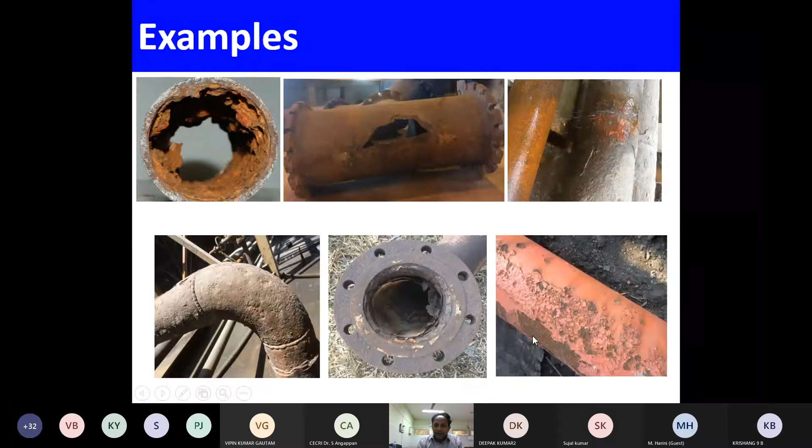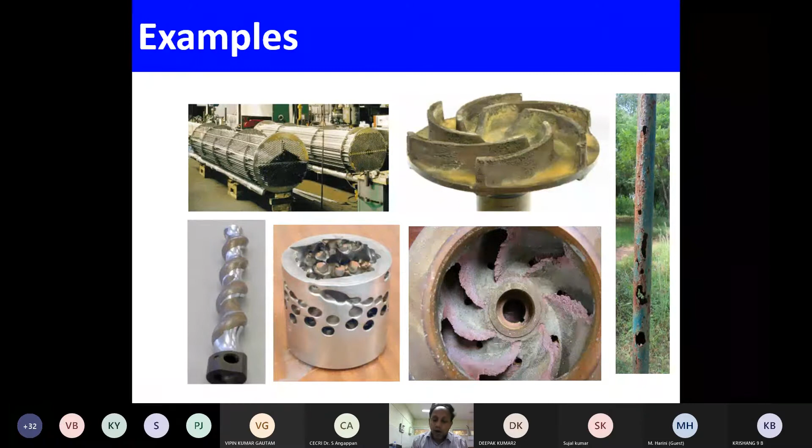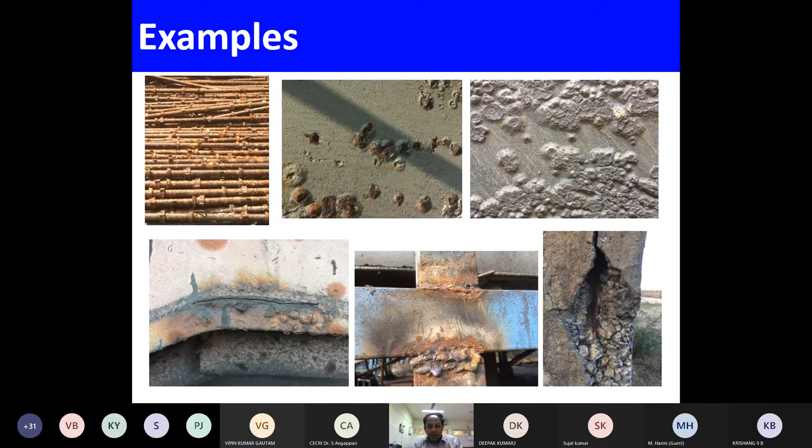Now you see that inside the steel rod, corrosion has happened. Once the corrosion has happened, the product which was accumulating on the surface built up a lot of stress. Then one day it cracked the building. That is how your building collapse happens.

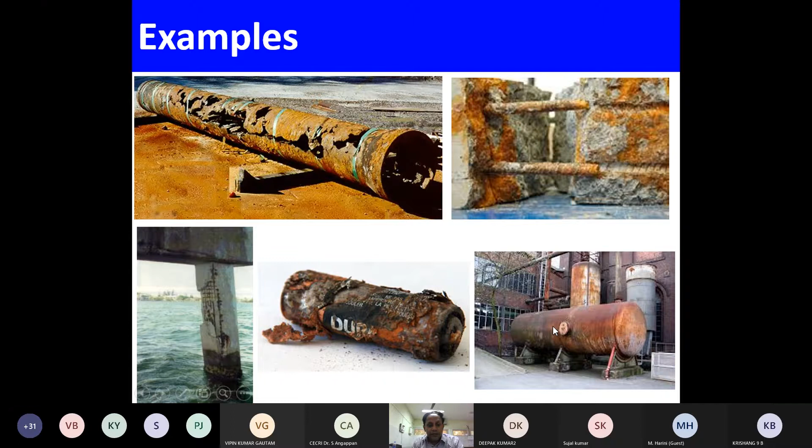Then this is a storage tank or a transporting tank. When we go to a petrol pump, the petrol comes to the petrol pump through a container. It's made of metal, or the gases coming to the depot, that is also made of metal, or your acid, all these things use metal. So everywhere, the components we are seeing here are mostly corroded.

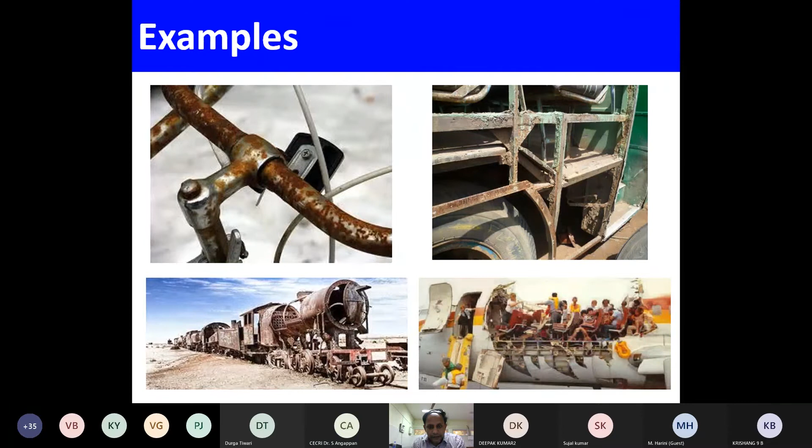That bridge... just a minute, Barik sir. Yes, sir. Barik sir. Yeah, please go ahead, sir. Are you moving the slides? Yeah, slides can move, no? Yeah. Okay, sir. Okay, moving.

So what I was trying to tell you, we saw the transport sector, just one example, remember our cycle, how it's getting corroded. Then we come to pipelines, bringing drinking water to home or bringing petrol to our vehicles. Then we look at the building where we are living, the steel structure inside the building is also getting corroded. But all these structures are external.

Like right now where I am sitting, the chair legs, suppose they are made of metal, or the desk where you keep your laptop or your books, that may also be made of metal. Just observe in your classroom, all these benches and tables, if they are made of any metal, they are not looking new all the time. So we give a coating. Still they start corroding. And how that corrosion happens, I will explain.

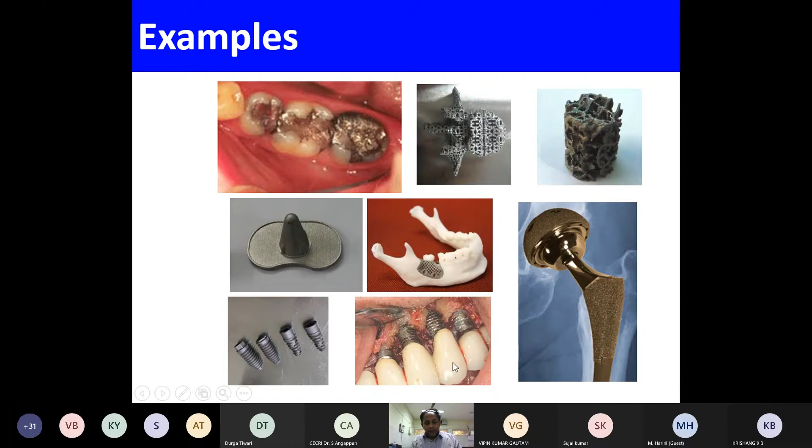Then it contains a crown. This is the crown. It will be made of ceramic or maybe metal, depending on the cost and other things. But what I'm trying to tell you is, all these components undergo corrosion. So now I show you one example here. You see what's happening here.

So normally corrosion is what we call a chemical or electrochemical reaction between a material, that is metal, and its environment, and that produces the deterioration of the metal and its properties. It means you saw your cycle, that structure, your handle is made up of a metal, and it reacted with an environment. What is the environment? Every day you go to school and come back. The environment here is your atmosphere.

Like I was telling you, an example, your classroom. In that classroom, you have a bench and you have a table. Then those benches and tables start getting corroded. So what is the environment here? That is the classroom. But we have to look at the property of the classroom. What exactly is there in that atmosphere that actually corrodes my metal?

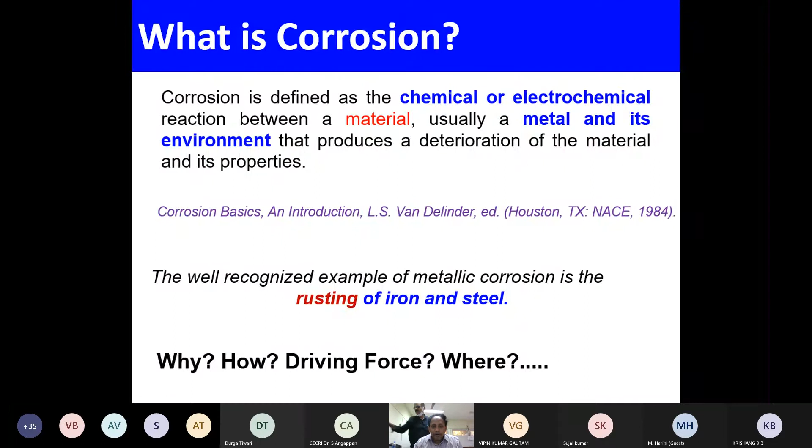So now we will see. If you remember your class 8 book, metals and non-metals, in the first paragraph it talks about the minerals, it talks about the ores. So here, when I am talking about my cycle, what metal is it made of? Is it made of mild steel?

And if I look at my mobile charger, the current is coming from the plug to your mobile. What metal is inside? Is it coming through a plastic wire or a metal wire? And your laptop also, what is the body? If you look at the laptop body, is it a plastic one or a metal one? And your key also. So all these structures we see around are actually metal.

So what happened here initially, if you see the human civilization, the progress of the human civilization occurred due to this discovery of the metal. These minerals are all lying under the ground or above the ground as a reservoir. These things they called minerals or the ores.

If anybody has read today's Indian Express, it was written there that long back, more than 460 BCE, the Karnataka region and Tanjavur or Salem were the places they used to extract metals like iron from the ores. And they used to export to different parts of the world. And from that, they were actually responsible for changing the civilization. A lot of ships, a lot of containers, everything came up once they were able to extract iron from the ores.

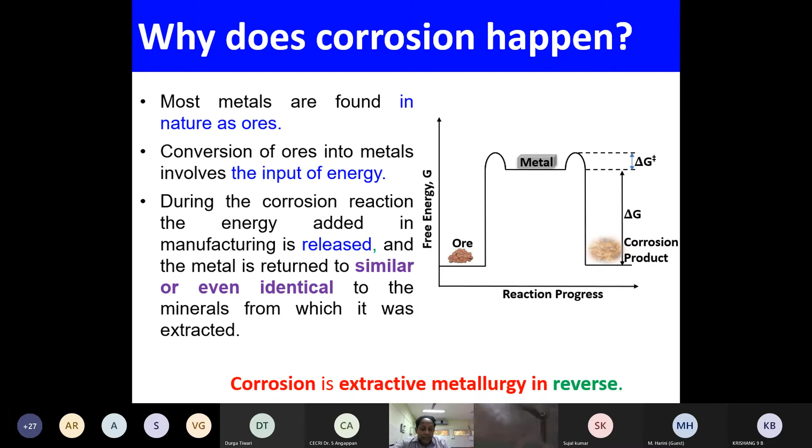Like any metal structure you see, for example our house, the wall might be given a nice color. You like, oh, I need to put a color into my bedroom, a pink color or maybe a blue color, depending on your choice. But it is not only for aesthetic purpose, it also has the ability to stop corrosion. That's what I will tell you.

So now we'll understand how the corrosion is happening. How my cycle is corroding, how my car is corroding, how my aeroplane is corroding, how the pipeline is corroded. So it is a metal. Let us think of a steel metal, and its composition is of iron.

The 8th class students should go and look into the metals and non-metals chapter. They should know which metal has what symbol. For example, iron is I-R-O-N, but the symbol we use is Fe. So in the periodic table, they should remember at least up to 30 elements by heart, starting from hydrogen up to zinc, or if you can, all 118. But there is a very easy way to remember.

You must look at what relationship you can develop with each element that you can see at home from the periodic table. For example, I am drinking water. In the periodic table, you will find hydrogen at position number 1, and oxygen at position number 8. Similarly for iron, you have to find its position, or the other elements there.

Okay, now I want to know how the metal is corroding. What happens? Just look at this beaker. I have made a rectangle schematic. It is a beaker, and this beaker contains an electrolyte. An electrolyte, I'm sure this terminology is also in the class 8th book, is nothing but a chemical compound which has the property to carry current in the ionic form. There are some ions that can carry the current, and that is inside this beaker.

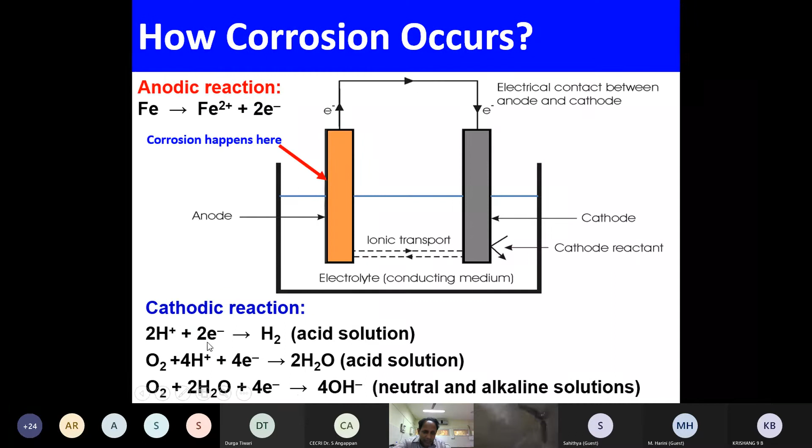Now you can see here what I'm trying to tell you. Now my metal has been eaten away from this plate. So Fe2+ will physically come out. The Fe2+ will come out, reacting with the other chemicals on the other side, like oxygen plus water, which was here giving rise to OH-, and is now forming iron hydroxide and a precipitate. So this is how corrosion actually happens and the product formation occurs.

And it's a very simple example. What I'm trying to tell you here is that when this iron and steel starts corroding in acid media, we saw some bubbles. But in the other places, with this OH- which is formed, you see there is a series of reactions. Fe2+ plus OH-, iron hydroxide, Fe(OH)3, then Fe2O3 and water. So these are the reactions.

This example is of a droplet of water lying on your cycle surface, or on the bench in the room. It's a very tiny amount of moisture. Now the oxygen from the atmosphere, the oxygen which we are breathing, also gets into this electrolyte and dissolves there, and this reaction initiates, and you get a different product. This is how corrosion happens.

But here is one example I have given, and I'm sure people will know where this structure is. Can anybody tell? Where is the structure? What is this one? Iron pillar. Yes. So this is at the Qutub Minar in Delhi. This is an iron pillar. The name itself suggests the composition is iron.

So why did I put this example here? This structure doesn't corrode. I think it's maybe 1,000 years old now. I don't know the king; the name of the king is probably Chandragupta. I think during that time this was being made, because India was undergoing a lot of furnace development. They were discovering these ores, and from these ores they were able to extract pure iron and make some products.

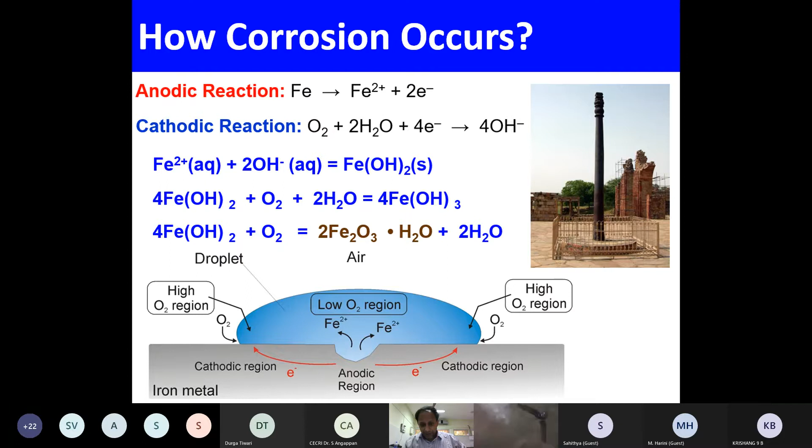So when they were extracting the pure iron and making this particular pillar, they added a couple of elements like phosphorus, which helped in forming a film on the surface, and they were able to protect the structure. So this is the structure.

Another example I'm giving you, which you will see in your textbook, is iron and copper. Here I have taken steel and a copper wire, and exposed the two of them to water. For example, in a heat exchanger, there are tubes coming in. These are like titanium tubes, and this particular one is copper. In these two cases, you can see this first one.

This example you look at here. This is very clean. This is corroded, that is not corroded. When two metals are joined together, like sometimes your metal door is there, if the handle is a different composition, you will see corrosion starts there. Then if you have nuts and bolts of two different compositions, there also corrosion starts.

So these are the examples I'm trying to tell you, and here I'm telling steel and copper, but steel is the one which is corroding, when they compare. These things you have to look into a textbook. It is called the reactivity of metals. You can look into the series. There are platinum, titanium, carbon, and at the top of the series is gold. Like for example, the jewelry gold.

If you see the jewelry, the gold, why is it so expensive compared to steel? First of all, gold is not found as ores. There are some ores, but mainly gold is available as gold. So it never existed as a compound. It's very stable in the air, normal atmosphere. It will never react and form any product.

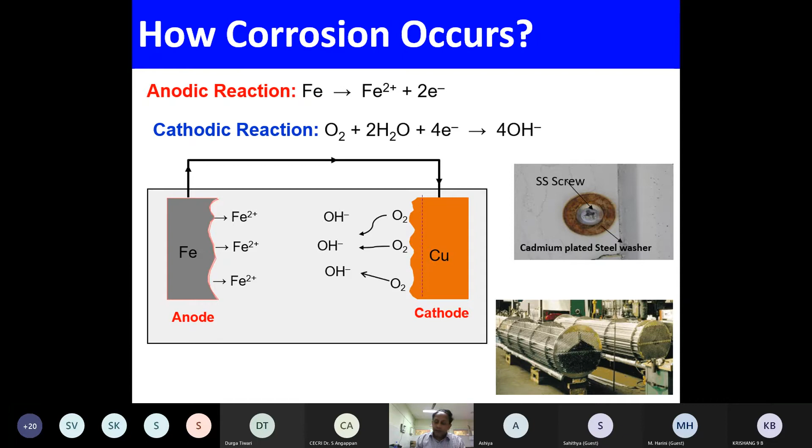When you go to higher classes, you will understand why they have been ranked like that. But I can tell you, a lot of measurements have been done to prove that a metal like gold will not corrode. If you make jewelry out of iron, it will corrode. We do electrochemical measurements, and we have confirmed this.

And this is another structure here. Can anybody say where it is? Anybody? Anybody from Tamil Nadu, or the Kanyakumari side? Sir, I am from Tamil Nadu. Yeah, can you say where it is? Have you been to Kanyakumari? No, sir. Okay, this is called the Thiruvalluvar statue. If you go there, you will see the Vivekananda statue on one side and this statue there.

But the interesting thing, why I put it here: what are the factors involved in corrosion? So far we saw the atmosphere is also responsible for corrosion. Then I showed you a beaker with liquid, an acid environment, with oxygen and water. But this structure is in the sea itself, in sea water. This structure is not made of metal, it is made of stone, so there is no corrosion, but another phenomenon occurs called erosion. Our institute also works to prevent the erosion of this statue. This poet is very famous here.

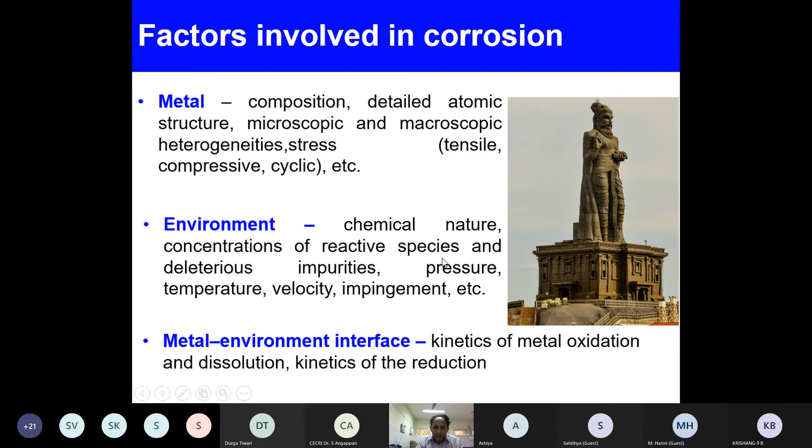So whatever environment you are seeing, any compounds which are very reactive in nature, high temperature, high pressure, your metal and this environment can start reacting and corrosion can proceed. So now I want to prevent corrosion. How do I mitigate it? The metal which is corroding is called the anode and the metal which is not corroding is the cathode. Then I have an environment, that is your electrolyte, and here the current is passing. So I have 4 components. If I can control one of them, I can mitigate the corrosion.

So what changes should I make to the anode to control the corrosion? What changes can I make on this side to control the current? And what strategy can I adopt so the current doesn't go from this metal to another metal? Like at home, when you're plugging in your mobile phone, the 2-pin plug, you are holding it by the plastic.

So plastic is what it does. It doesn't transfer any current to your hand, so that way you are protected. So similarly, this current which is going from this metal to the other side, I can put a plastic cover on it, or what you call a coating.

Or this metal which is corroding, I can change it or I can do some coating on it. It will not corrode. Then I have an environment here. I can put a barrier in between that. Like our wall, I told you, inside the wall you have the brick, the cement, then you have a steel rod. But on the top of the wall which is facing us, we put a coat on that. We put a color. So that color will stop the oxygen and water from going inside and stop the corrosion. It will not allow that.

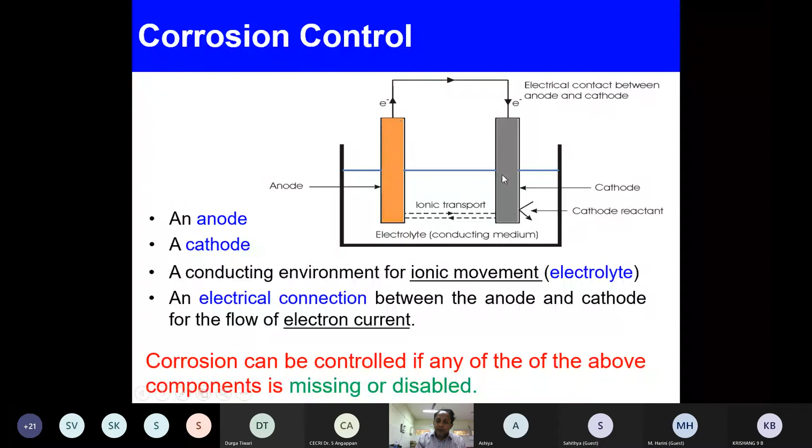So this is what I'm trying to tell you. This whole setup is responsible for corrosion. We can control it if one of the components is missing or disabled, or I can put a barrier and all that. So these things we will discuss. So what do we do actually, how do we control the anode part? I can modify the metal.

Like if you look at the stainless steel utensils in your home, they are made of steel. But your normal pipeline is made of mild steel. In some pipelines, the composition is only iron and carbon. But to get a better alloy, we put iron plus carbon plus chromium plus nickel. So we modify that metal. We make some alloy, and then we can do modification of the environment in this room.

In this room, if a lot of things are there which are going to corrode my metal, if I can remove them, we can also prevent the corrosion. There is one terminology we use: scavenger. Oxygen in the atmosphere is very responsible for corrosion. If I can remove all the oxygen, there will be no corrosion. Then change the metal. Okay, then I can have some non-metallic materials for construction. It means instead of using a metal species, if I can use some non-metals like plastic, it will not corrode.

So what we do, we use a suitable alloy, so we modify the metal, then we put a coating. If you put a coating, you create a barrier between your corroding metal and the environment. Then you do cathodic protection and use a corrosion inhibitor. These are some strategies I'm going to talk about. You can look here. This is the rebar which is in the wall of your house. We have given a coating so that this will not corrode.

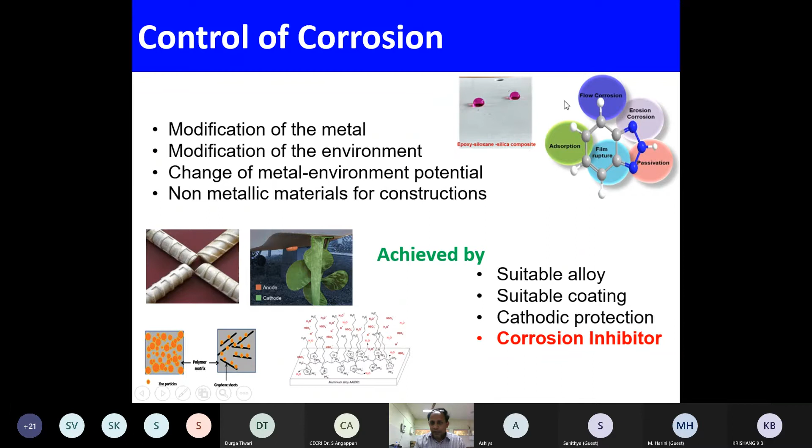Then you can see this is actually a ship. This is a propeller. So in order to protect the ship from corroding, I am using a different metal, and by doing that I can protect it. And this is a metal. I have put some coating on top of it. This is a superhydrophobic coating. It will never allow water to accumulate on the surface, so it repels the water. That's why it's called superhydrophobic. And these are the mechanisms we explain. So I'm going to talk about them a little bit.

I know this topic will be very tough for you, but just to understand, go back to your classroom and look into the metals chapter, and there are concepts like what is corrosion, what is anode, what is cathode, what is an electrolyte, what is plating, what is galvanization. Read these terminologies.

Okay, somebody's mic is on. Can you switch it off? Can you mute it? Someone's mic is on.

Okay, so this is a chemical substance we take. A chemical substance means like your salt, what you're eating, that is a chemical substance, sodium chloride. So in the lab, we put a lot of chemicals in that environment to protect it. Imagine water is coming to your home through a pipeline. The pipeline is corroding. So I have to use a chemical that will protect the pipeline as well as not harm us. It will not create any damage to us.

Or your pipeline: when you are going on the street on the main highway, you will see big pipelines going along the highway. These pipelines actually carry your oil, maybe crude oil, the processed oil like diesel, petrol, kerosene, and gases, and all these contents.

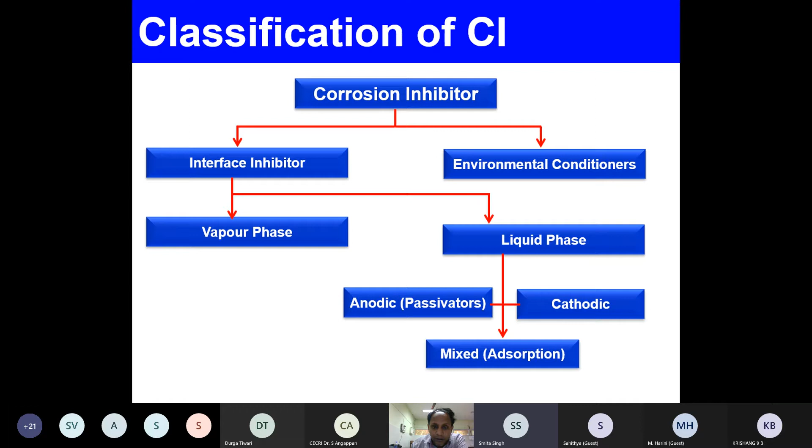So what people do in order to protect the inside from corrosion: they will add some chemical substance, and that chemical substance will go inside the metals through that petrol and diesel, and it will form a film on the metal substrate, and it will prevent the corrosion. So these are things I was trying to tell you, and this mechanism is forming. I don't think you will be able to understand, but here what I can say is that this chemical substance is what we call an inhibitor. We do some experiment here.

When you go to higher class, you will do some experiment. If anybody understands Ohm's law, the voltage and the current relationship, here also this is a voltage, this is a current. I use these two measurements. Either I measure the current or the voltage of a metal which is corroding, and then I put some chemical substance into that and measure, and then look at this graph. Here you can see the current. The moment I'm adding an inhibitor, the current is going backward.

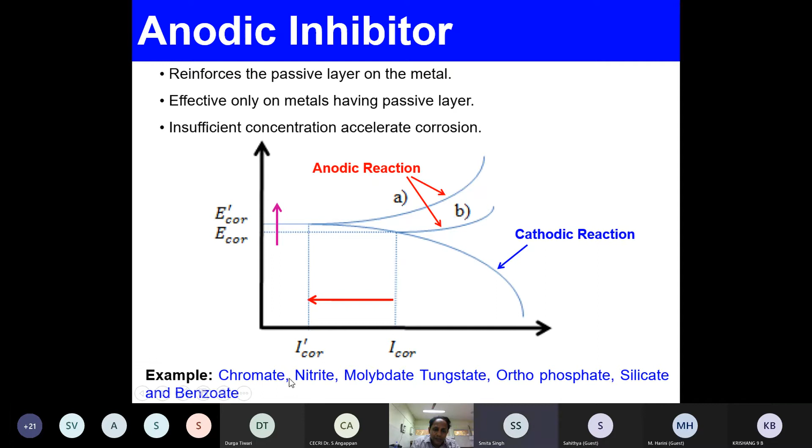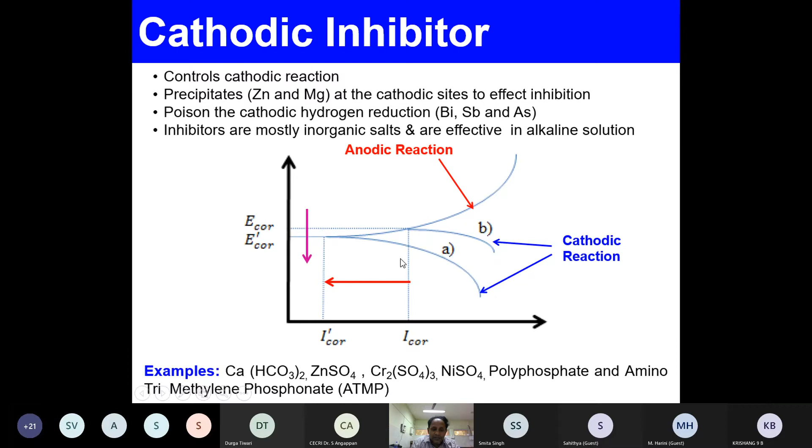These are my chemical compounds: chromate, nitrite, molybdate, tungstate, phosphate, silicates, and all these compounds. Similarly, there are some other compounds: zinc sulfate, chromium sulfate, nickel sulfate. All these compounds have a mechanism to prevent the corrosion. This is how we look into that. There are some organic compounds also. If anybody knows nitrogen, oxygen, they also prevent it.

In this particular work, I am talking about nanomaterial. First you have to understand what is the meaning of nano. When I teach my son about measurement, you have to get the concept of how we measure a dimension in a unit. First in your class, they teach you millimeter, then centimeter, then meter, then kilometer. You are able to see a compound in a millimeter shape, but when it goes to the nano range, if you go there you cannot see.

But there are some compounds that exist in that size, with a dimension less than 100 nanometer, and this can be like a dot type, or a tube type, or a fiber type. These compounds we take into our application. You will find nano compounds in every application, whether agriculture industry, biomedical industry, or the electronic industry, any industry is using them.

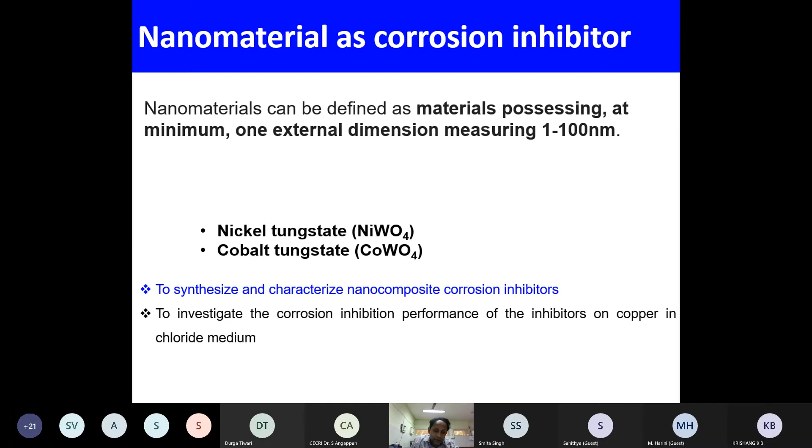So my student and I have done this work. We have taken two compounds called nickel tungstate and cobalt tungstate. We made them in nano shape, less than 100 nanometer. Then we tried to protect the corrosion of copper. Look here, this metal is copper. Copper application, you know: simply open up your mobile charger, you will see the inside is made of copper. Where the current is coming inside, you will find it's copper.

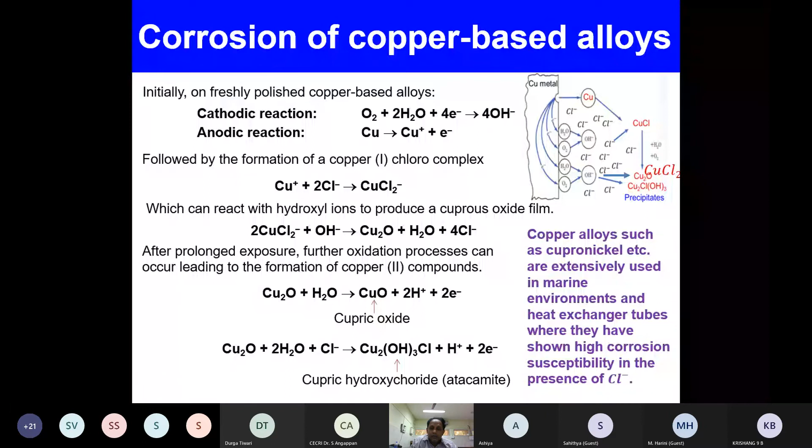Copper in application is used to make pumps, valves, heat exchangers, and they carry seawater. In that case, it starts corroding. When it corrodes in seawater, this sort of reaction happens. In seawater a lot of chloride is there, sodium chloride, the salt, and that salt goes through a series of reactions and forms different corrosion products. So in order to prevent and mitigate the corrosion, I do all these kinds of things. So here I make some nanoparticles.

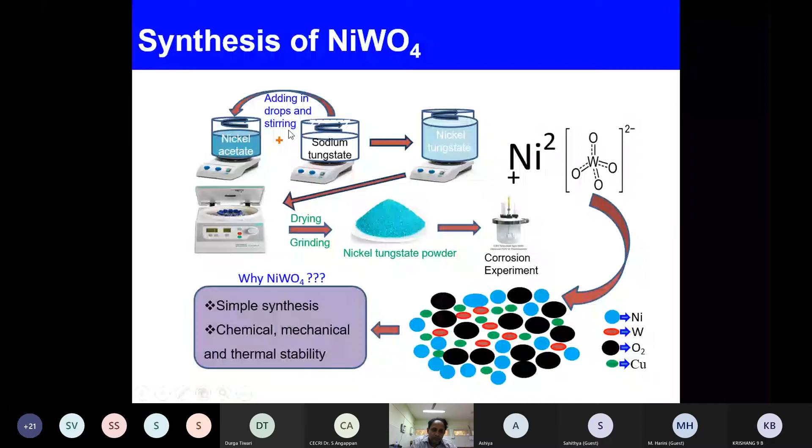It's made of nickel tungstate. To make very small particles of nano size, we follow a simple chemical method. Then we analyze these things. You can see different shapes. Sometimes we control the shapes so that we can get some desired property and better corrosion resistance. And you need physical evidence whether it really is nano size or not. So if you see single particles here, they may be less than 100 nanometers.

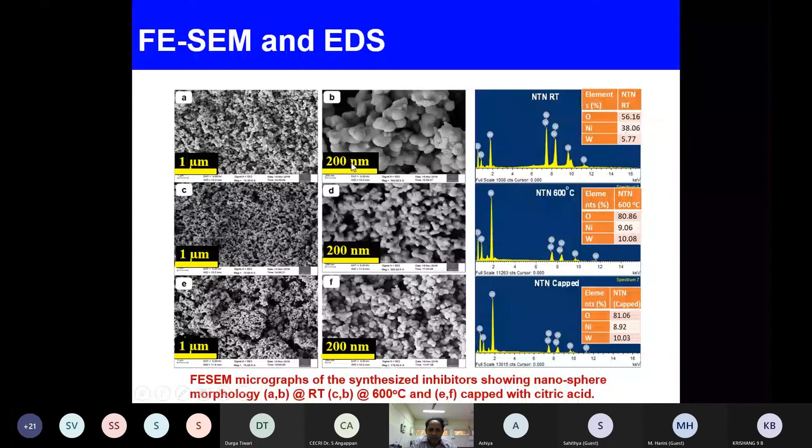On this scale, you see each particle is maybe around 50 to 60 nanometers. So this is the physical evidence that I'm able to make nanoparticles and use them for corrosion resistance.

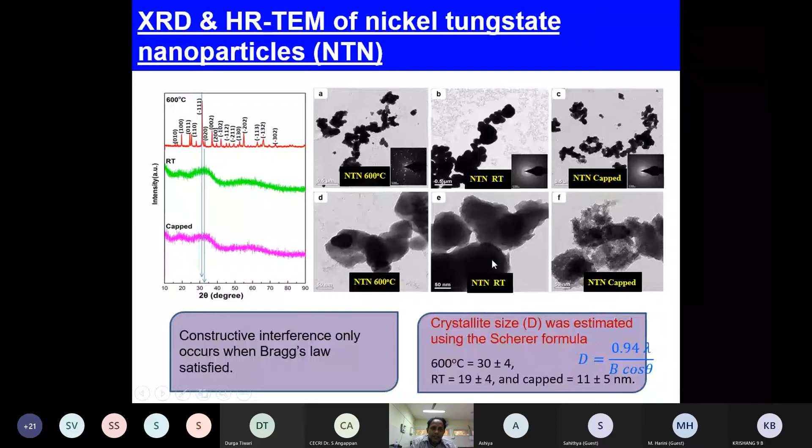Further, these are the techniques. When you come on open day, you will see all these instruments. This is called a scanning electron microscope. Then we use another electron microscope, called a transmission electron microscope. In these microscopes we analyze all these products, because these are the physical evidence you need. These are the compounds we use as a corrosion inhibitor.

As I told you, if you understand Ohm's law, which is nothing but a relationship between voltage and current, the same concept is used here. This is current density, which is nothing but current over area. We measure current and voltage, but in an environment, in an electrolyte. We monitor the current using different concentrations or weight percentages of the inhibitor, and these inhibitors act as a barrier on the surface and decrease corrosion.

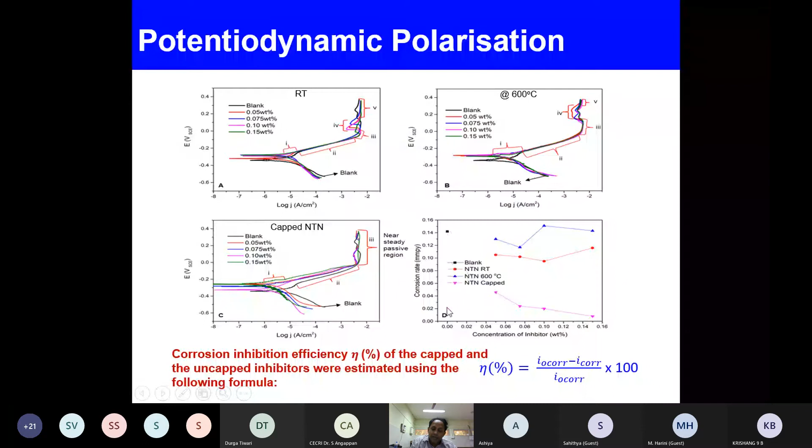If you look at my compound, the blank one is pure copper. It's very highly corroding. Now I use some inhibitor, 1, 2, 3, 4 concentrations. You can see the drop here. The corrosion has dropped almost 7 times. That is how, using this nanoparticle, I'm able to reduce the corrosion.

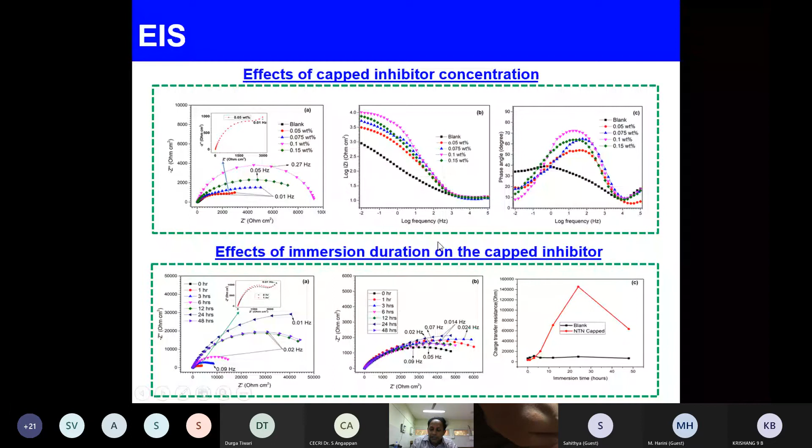These are various examples you may not understand now. But whatever you are studying, like the current relationship, we use in a different way to quantify corrosion. This is called the impedance technique. Impedance is nothing but resistance. In a DC system, like in Ohm's law, you get resistance. In an AC, alternating current system, the resistance is known as impedance. Impedance has two components, real and imaginary. Through that we try to quantify the corrosion inhibition rate.

If you understand the graph, you will understand the entire concept of any topic you are studying, whether it's metals and non-metals, electrochemistry, or your current chapter, the chemical effects of current. When you are in 8th, 9th, up to 12th class, these graphs and schematics you must understand.

I'm just showing you all this. If you're not able to understand, that's fine. But you should develop an interest when you look at a schematic or figure in your book and try to understand what it's saying. Any graph you see, first look at the x-axis, then the y-axis. Why is it increasing, decreasing, or stable? If you ask these questions, you'll understand. Ohm's law, which I told you about, is a straight line passing through the origin, but is it true all the time?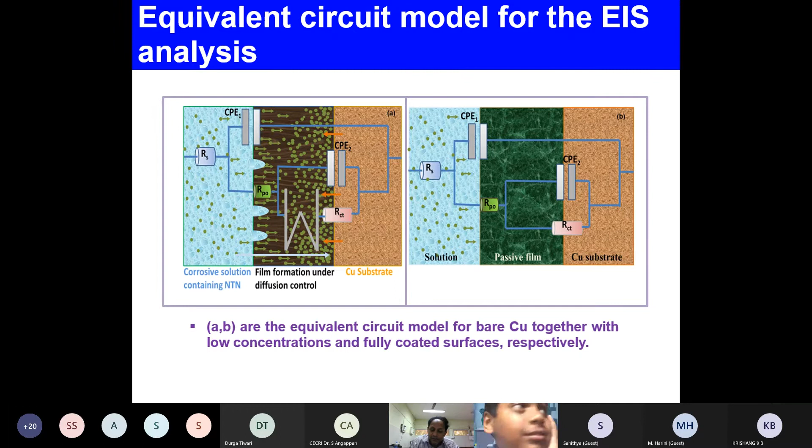This is a question for you. You must find out: is it always a linear graph? You will get voltage versus current, the resistance you get; is it always linear?

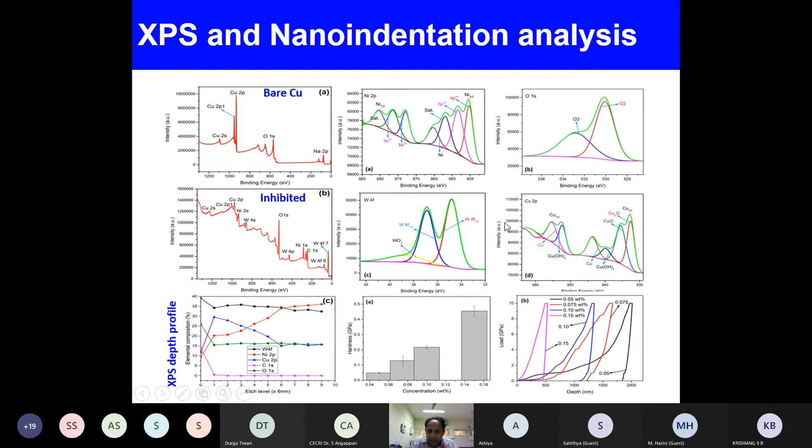Then we have a couple of other techniques. Like I said, when metal starts corroding, you will get some corrosion product. So these are the corrosion products. You can see here the bare copper. Then I try not to corrode this one. I'm trying to look at the different corrosion products here. So these are the various techniques I use to further qualify or quantify various parameters.

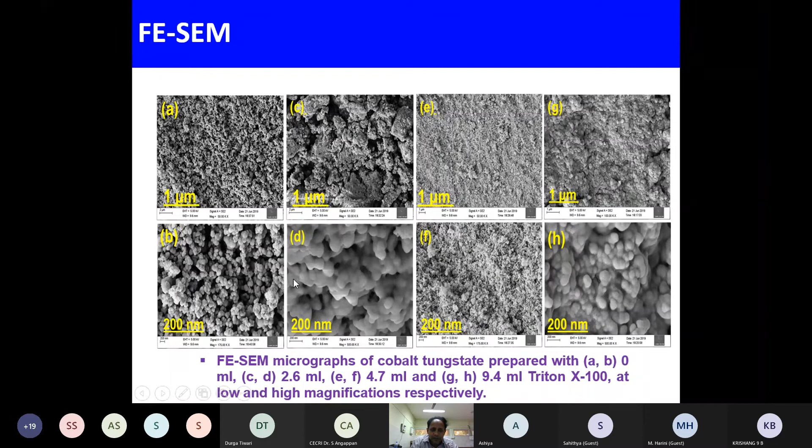So this is one of the compounds I used, a nanoparticle, nickel tungstate, and was able to control the corrosion. Then I just want to talk about another one. Cobalt tungstate is a nanoparticle. It is this one, and you can see here nicely some particles; the size is a little bit higher, but these are almost close to, you can see here, less than maybe 10 nanometers. So these are all nanoscale. Similar things we also did.

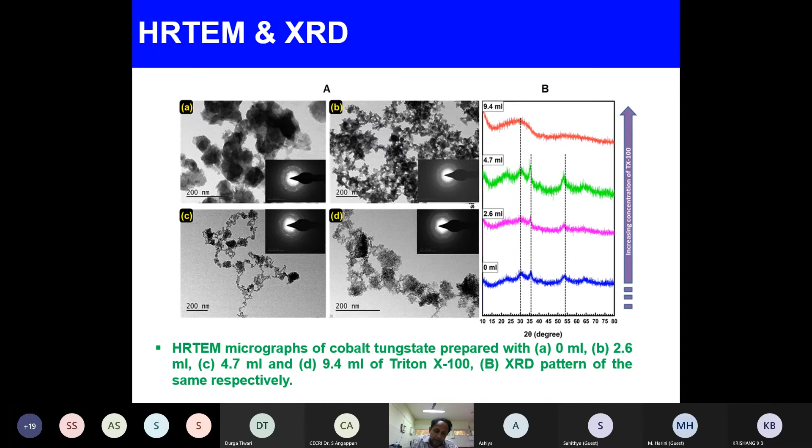We used another high-resolution electron microscope, a transmission electron microscope, and an XRD. These are the various things you will study with the different equipment here in this lab. You can not only study how much current is passing and how much corrosion is happening, but what the product is; those things we can all identify. Then we can quantify the corrosion rate.

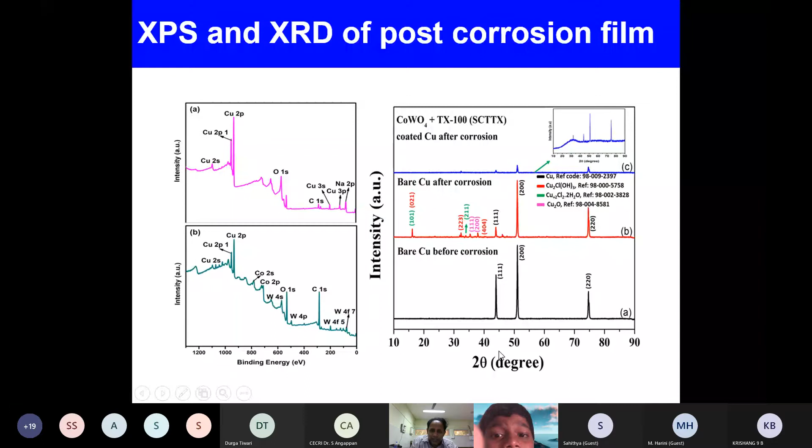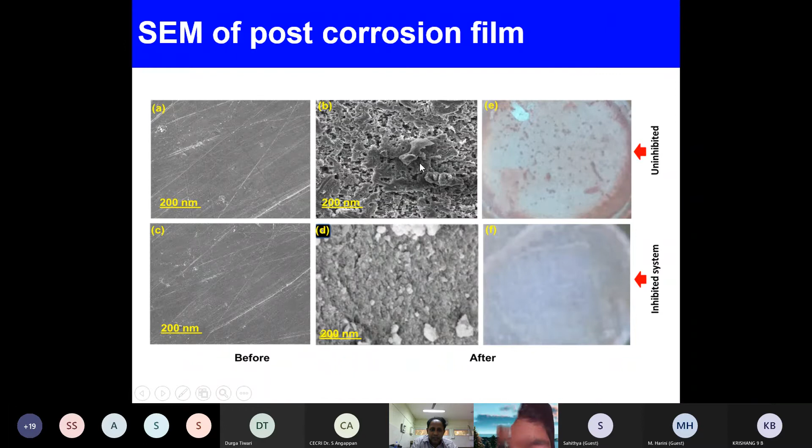Then I further analyze these corrosion products to reach a conclusion whether the corrosion is increasing or decreasing. These two structures you see. You can see a nice film is formed here, but there is no film here. So I'm trying to use this nanoparticle inhibitor to mitigate the corrosion. You cannot see the bare copper now, but here you can see it. Here it's not corroded; there it is not protected, and that is what the structure looks like. This is what we analyze. We take one, two, three structures and analyze.

This is another example; this is how I test it. What I was trying to do is put this nanoparticle on this copper disc, and you can see it's nicely coated. But once nicely coated, I created a scratch mechanically. Just took one blade and cut it. By doing that, I exposed the surface again.

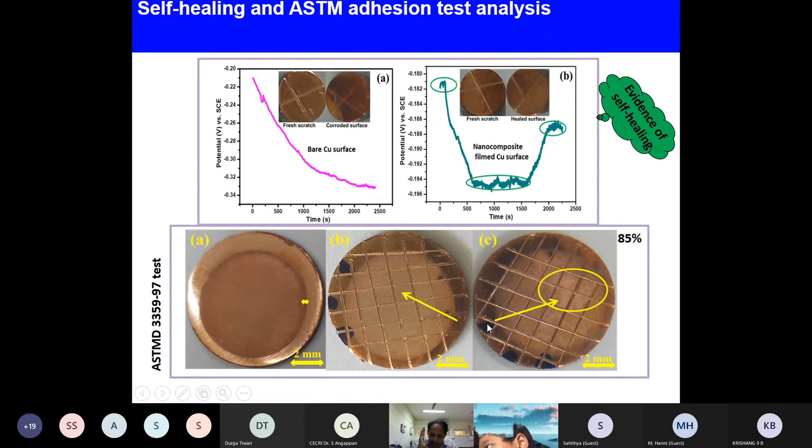The moment I expose the surface, you can see here the scratch initially, and the scratch is here. I put the film here, then it stopped here. This property I was able to see by visually observing whether my surface is corroded. So these are the nanoparticles that actually protect against corrosion.

So what I'm trying to tell you in this topic is that you have to understand the concept of corrosion first, because it is given in the textbook, and there you will find out how they protect. They use a coating. The coating is nothing but a paint. You see the paint on the wall; that is a coating, but that paint is for aesthetic purposes.

But when you go to industrial structures, you see on the electric pole, outside on the street, that is all well protected by paint. But that paint is not only aesthetic; it has a barrier property to prevent moisture, water, and oxygen from getting into the metal substrate. That way, it can prevent corrosion.

Or sometimes the reactivity series: you saw that in the reactivity series, the metals at the top, towards gold, are highly protected. If you come to the bottom, you might find zinc and magnesium; they're highly corroding. So we can sometimes use these two different components to protect the structure, or a pipeline, like the one in my topic, this copper pipeline which was carrying seawater, the chloride solution.

So in order to protect that, I was using these nanoparticles, nanomaterials, and I have also done a lot of work on these things using some organic compounds. These nanoparticles or nanomaterials, like cobalt tungstate and nickel tungstate, I used to put in that seawater, just run the pump, and they will go and get adsorbed on the surface, and it will not allow any corrosion. This is what I was looking into, and my students are working on it.